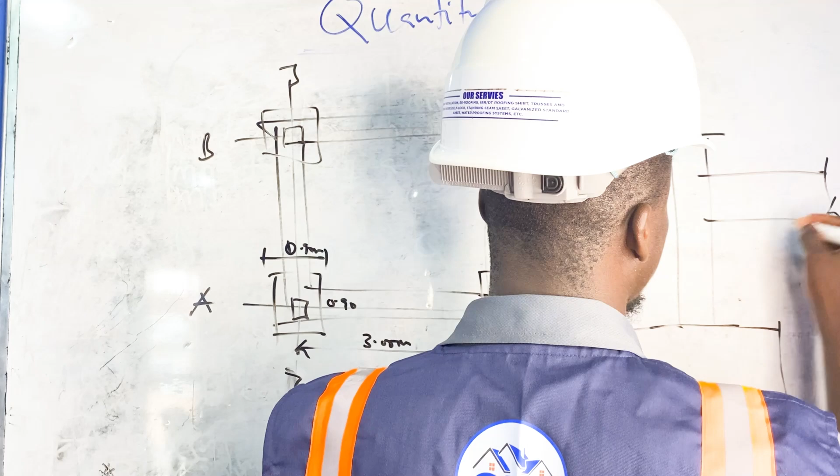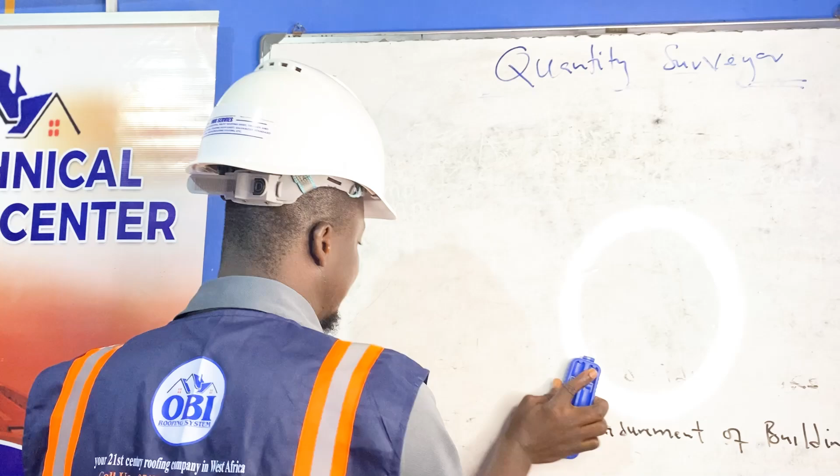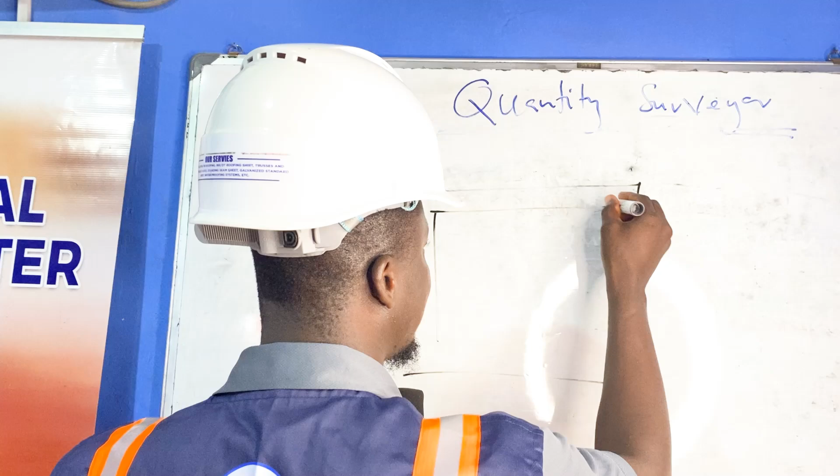So for instance, if we have a particular building, let's say I have this preliminary sketch. This is just an example sketch. I have this as, let's say, just a bedroom with one room over here. So these are my grid lines. I have grid line AA, grid line BB, grid line JJ, and grid line, let's say, XX.

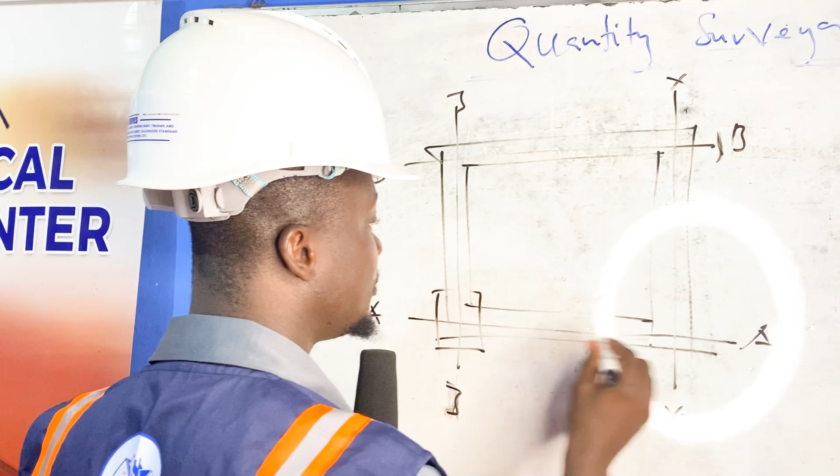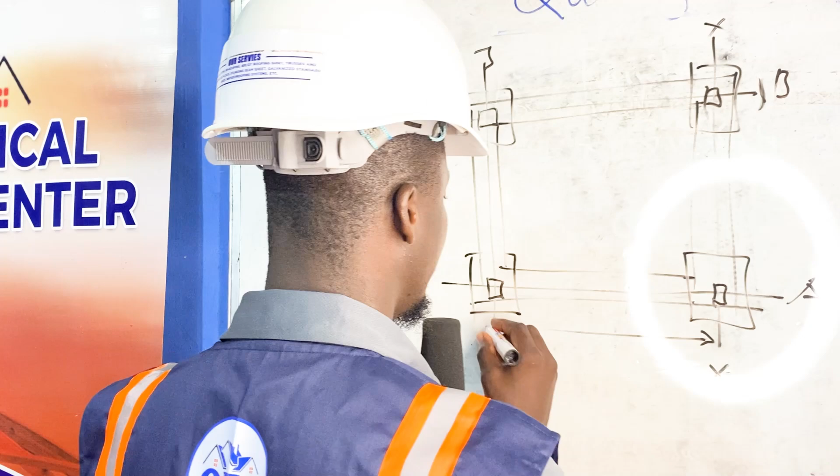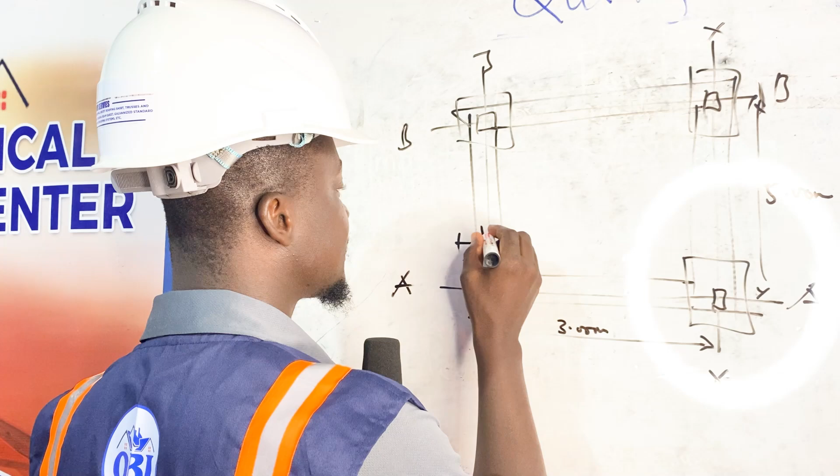Okay, so these are my columns. That's a column base. Then I have my columns within. So this is just a simple sketch. From grid line to grid line, I have here 3.00 meters, and here 5.00 meters. So let's say with the column base, I have here 0.9 meters, and here 0.9 meters. That's equal around the entire plan.

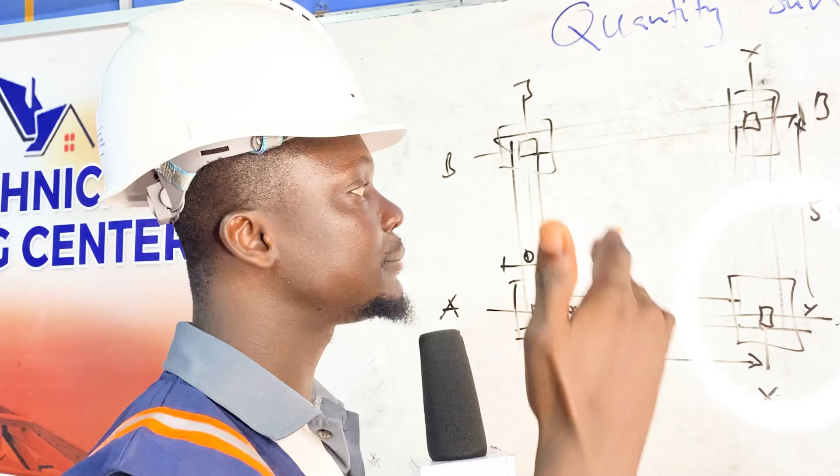So for instance, if I want to measure for blockwork on grid line AA, and I want to know the area, first I consider how high the blockwork is going. If it's within the foundation footing, I want to get to the foundation footing level before the oversight concrete comes on it.

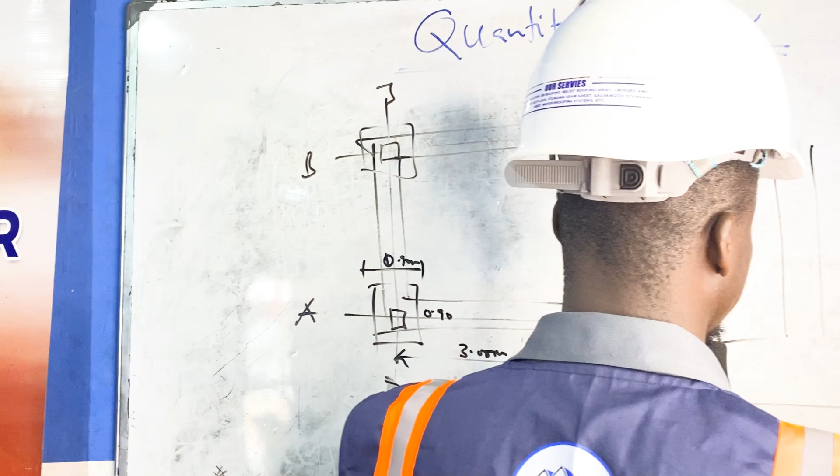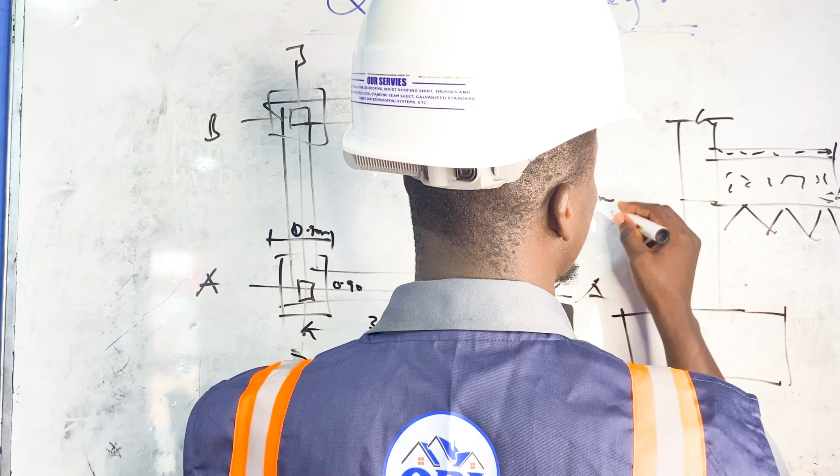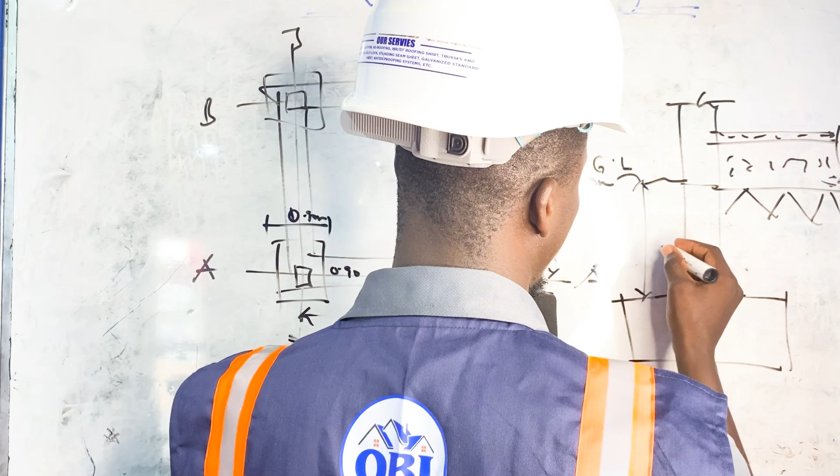So I have a section over here like this. I have my hardcore over here, this is the screed, this is the concrete. My ground level is around this area. From here to the top of the concrete, let's assume I have 0.6 meters. Then the foundation concrete is 0.3 meters. Then I have my blinding, let's say 0.05 meters. So this is a simple section that I cut within the plan.

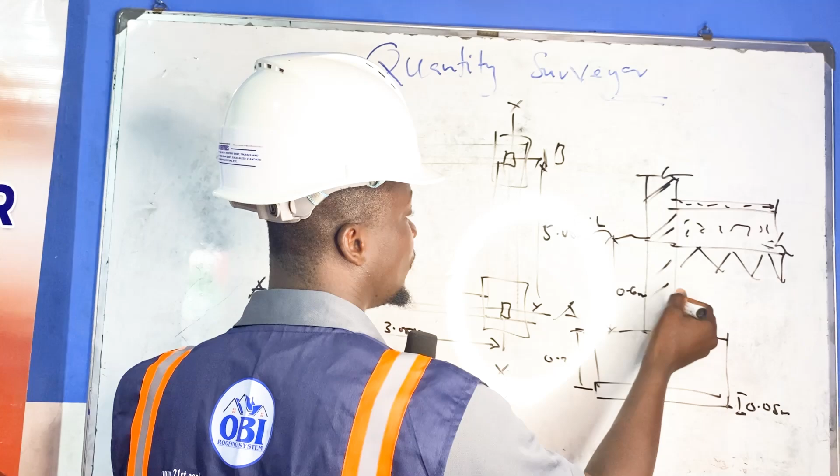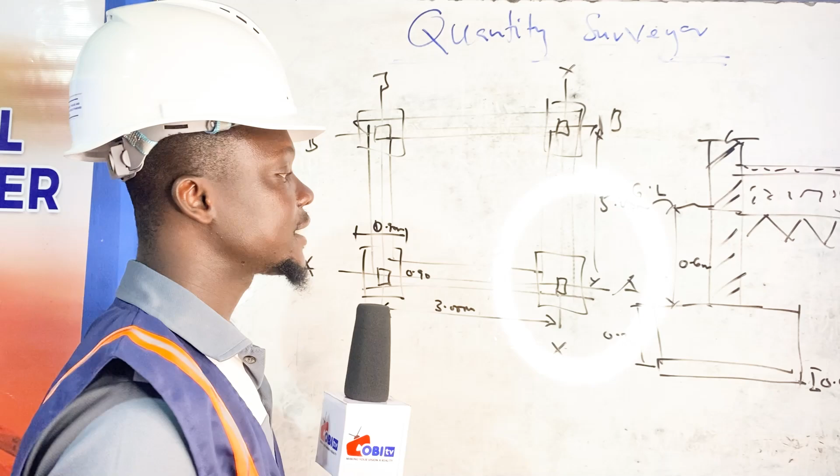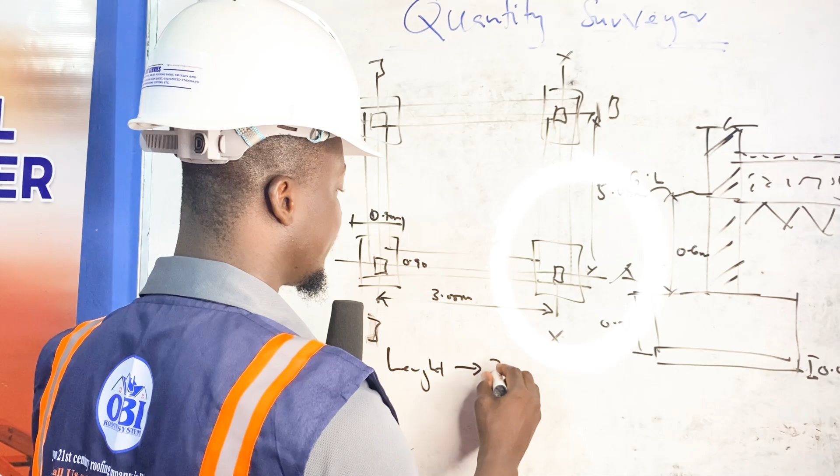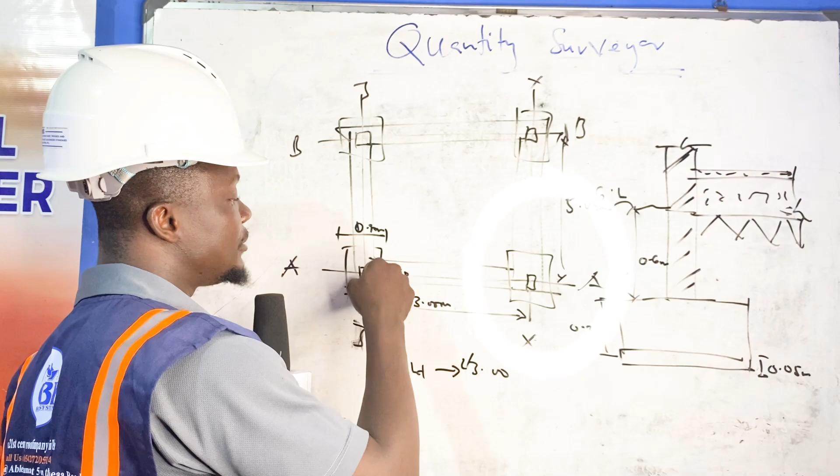Now I'm to do excavation, which means I have to excavate for the trenches. If I pick from grid line to grid line, I have the length, which is 3.00, and I have two sides, so it's times 2. Now you realize that part of it is entering the column base, and we need not calculate for that part. If not, when we calculate the excavation for the column base, it will be calculated twice, which will bring excesses and go against you.

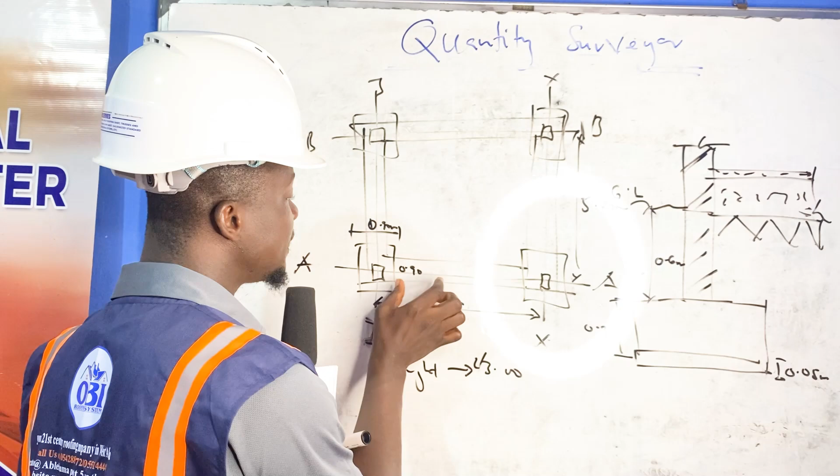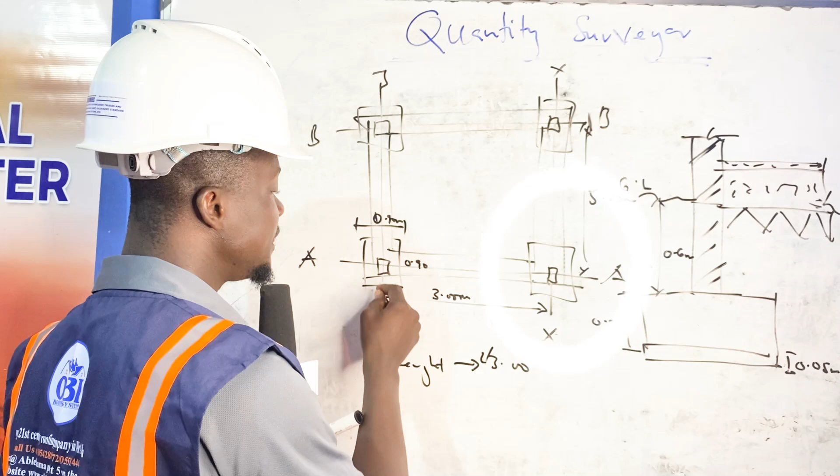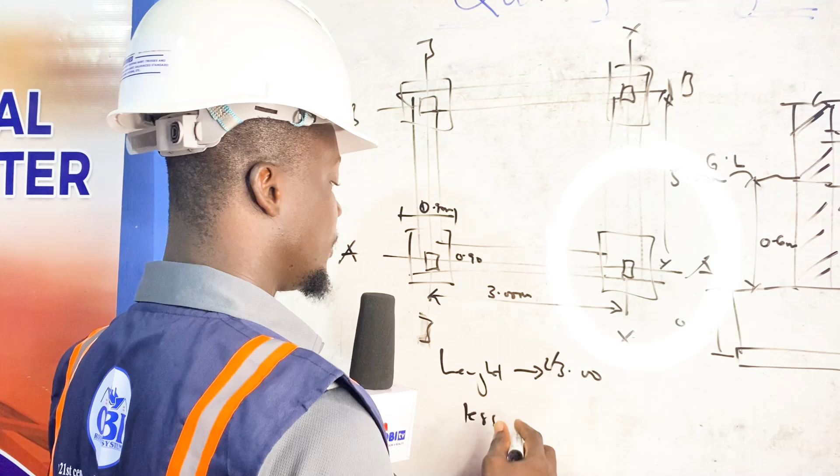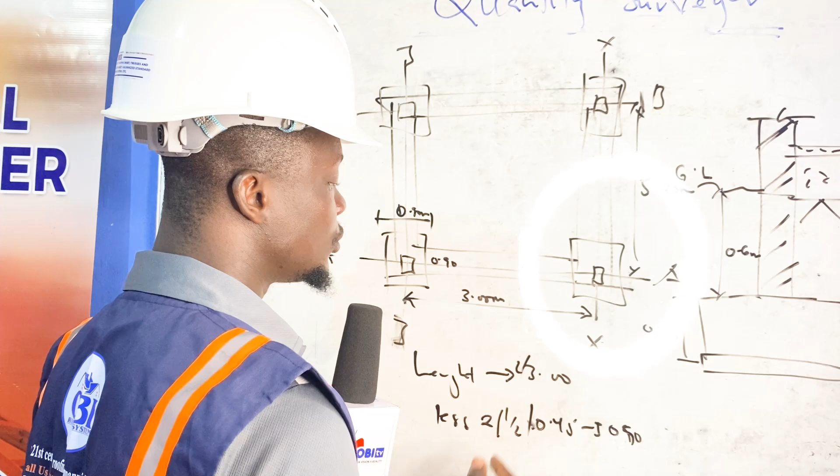So we need to come to the outside of the column base and get the end to end of the trench. If I have 0.9 meters square over here, I take half of it, which is 0.45. So I need to less 0.45 here and 0.45 here, two halves of 0.45, which gives us 0.9. When we less it from the 3 meters, we get the actual length of the trench.

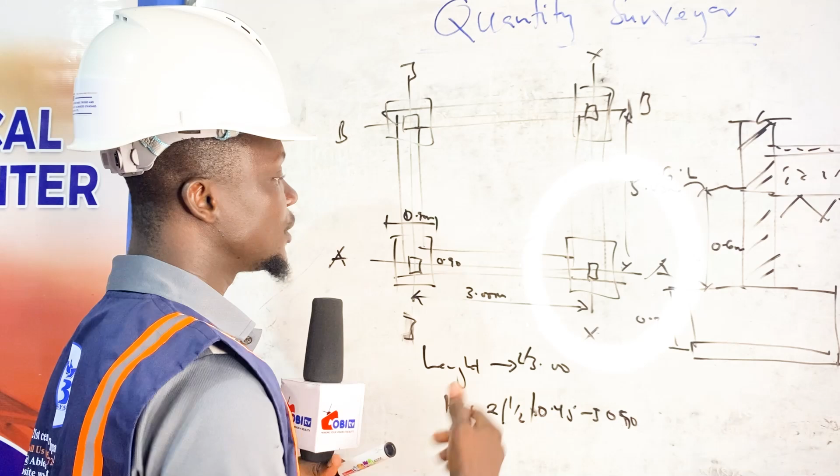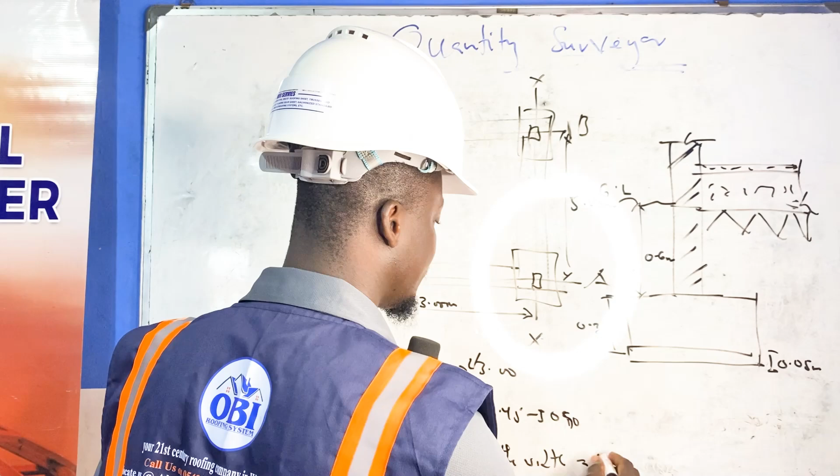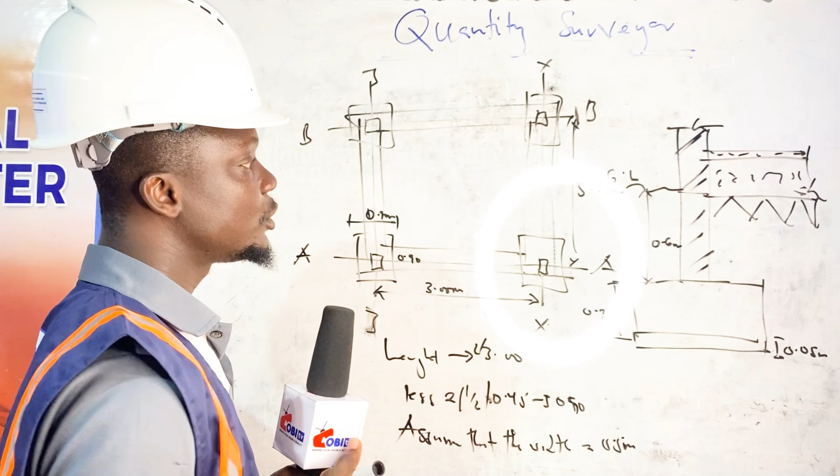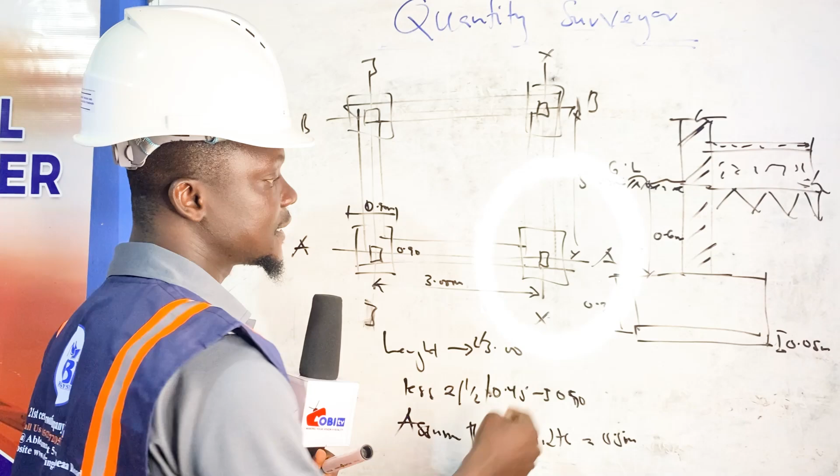After getting this, we need to know the width of the foundation. Assume the width is 0.5 meters. Then we look at the depth of excavation. With the section, this is where the ground level started; this is my earth. The depth from here to the top of the concrete is 0.6. Then I have the thickness of the concrete in foundation, which is 0.3. Then I also have the blinding.

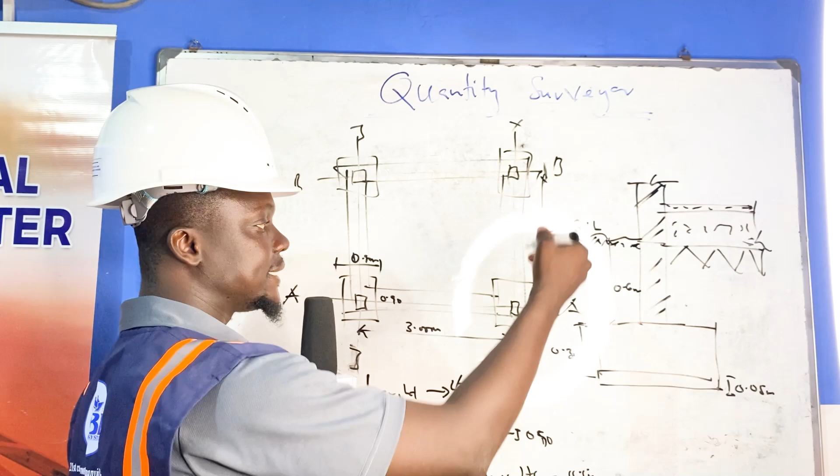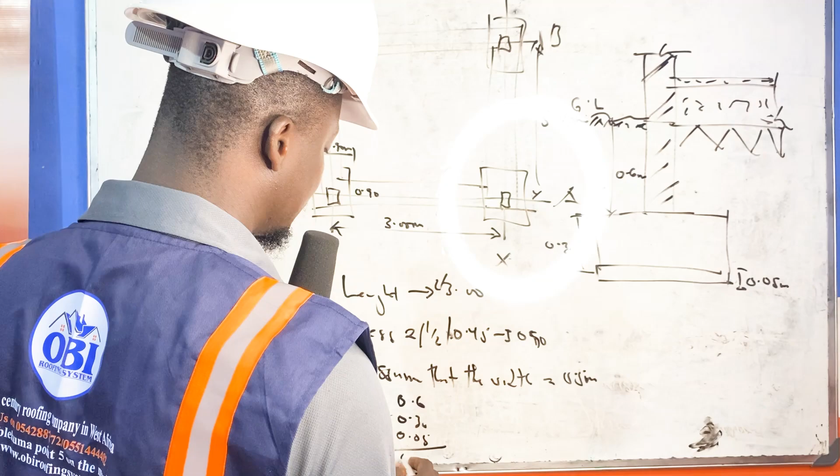0.05 over here. So I need to add up the entire. So I have 0.6, I have 0.3, then I have 0.05 over here. So I need to add up all these things, which will give me what? 0.95.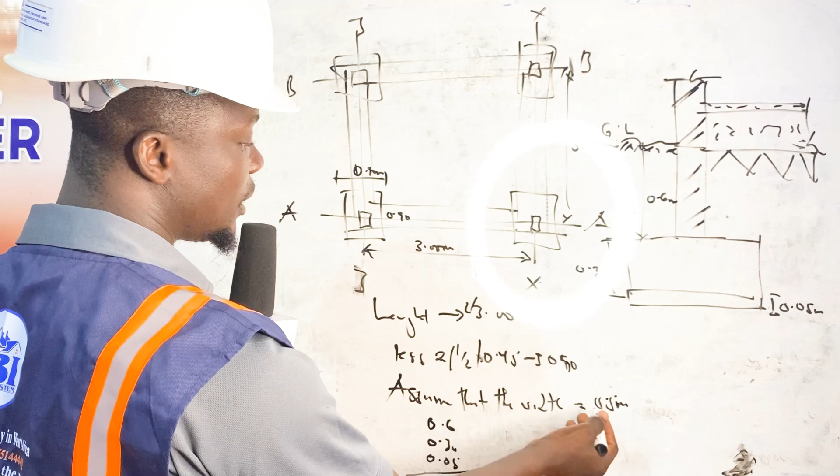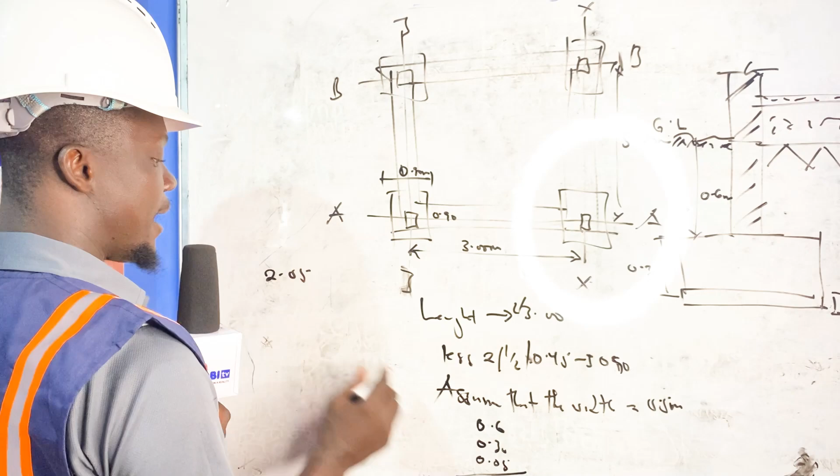So in order to get the volume, I have the length, which is after doing all these deductions. So we have this 0.9, this 0.05. So that is 3 meters from it. So when we less 0.95 from this, that means we are getting 2.05 over there. So I have 2.05 as the length. I have the width of the foundation, which is 0.5 over here. Then I have the depth of foundation, which is 0.95 over here.

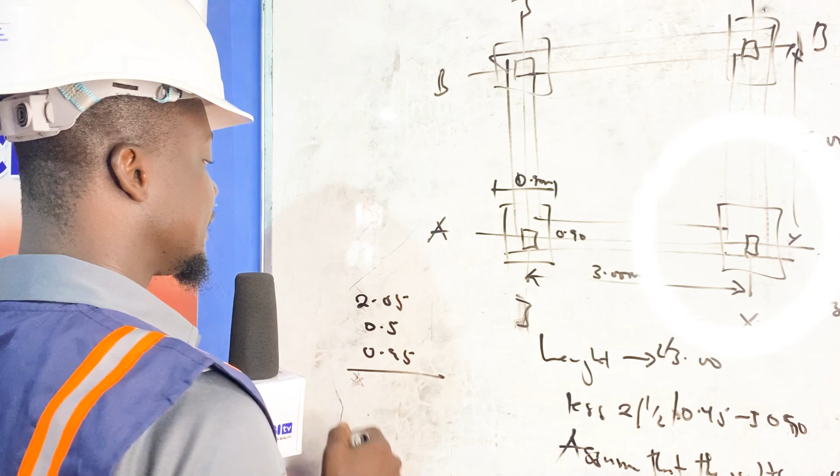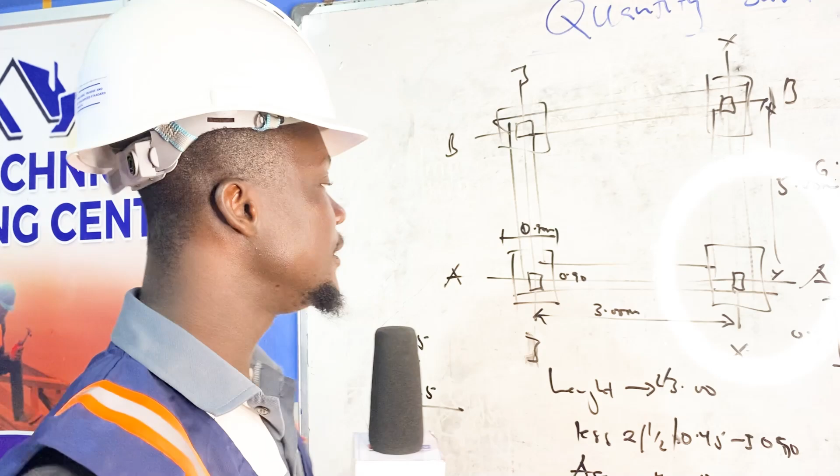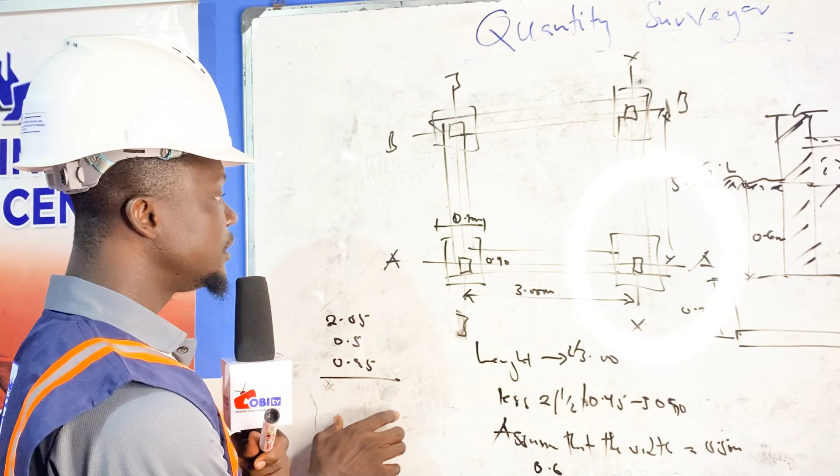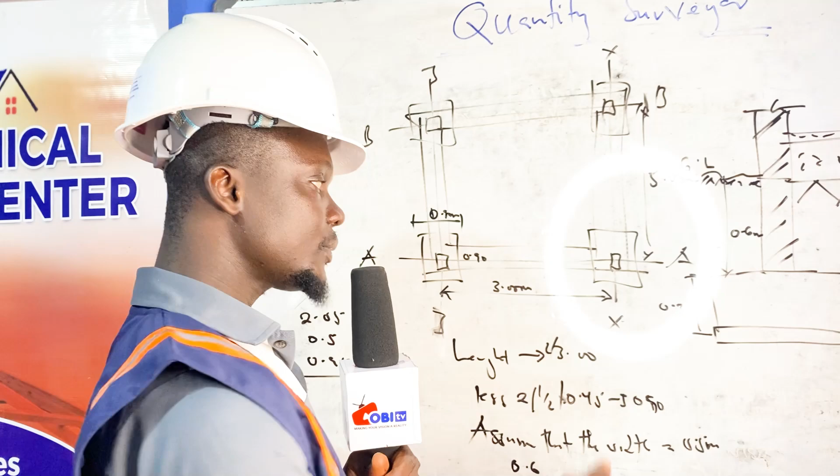So with this, it will give me the total volume of excavation. So if I multiply this by this and this, then it will give me the total volume of excavation. SMM 7 will say that in measuring for excavation for trenches, it's measured in volumetrics. So if I'm able to do this and get the volume of excavation, it tells me that the excavation that will be done on grid line AA for the trench alone will be the multiplication of these 3 items. That will give me the entire volume of excavation.

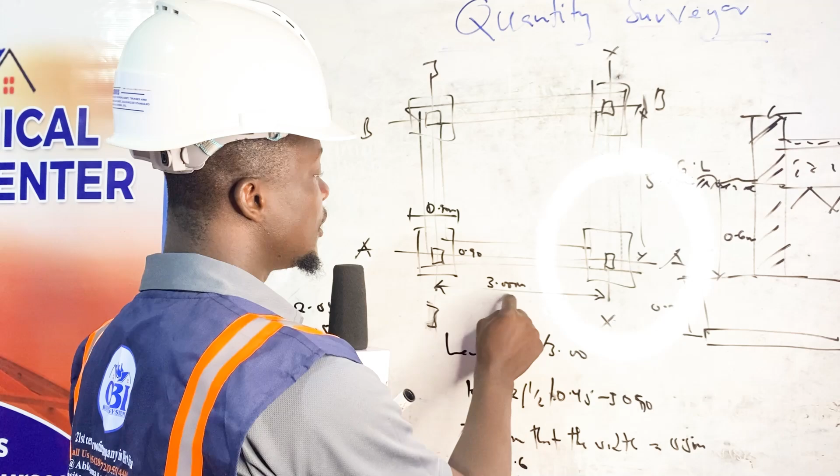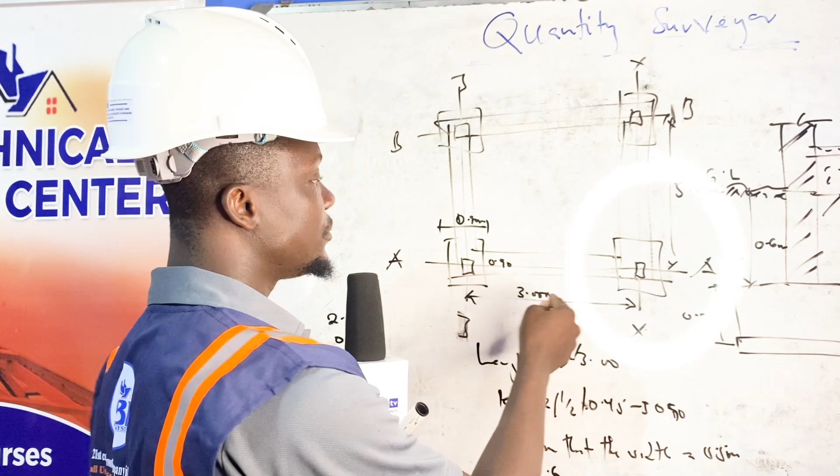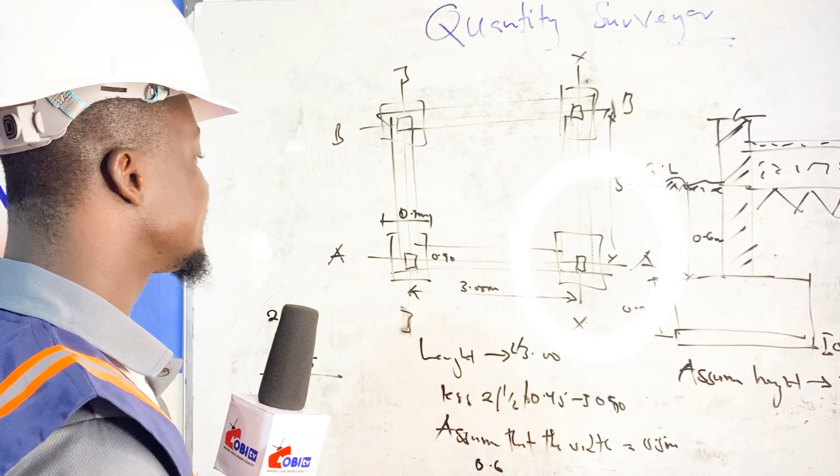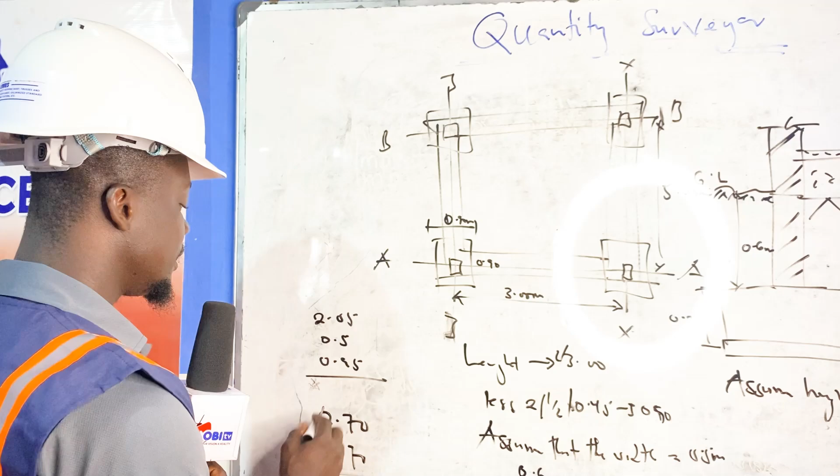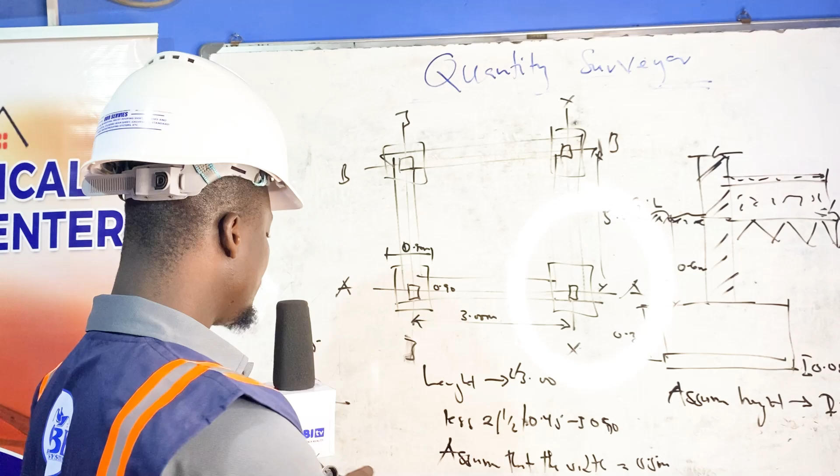So the 2.7 and an assumed height of the block work, which is 2.7 meters. So if I have 2.7 as the length and 2.7 as the height, multiplying this will give me the area for the block work that needs to be done. So these are some basic methods of measurement that are done in construction work. So when we do this, after the abstraction, we put this in the BOQ and we know that for the block work that needs to be done on grid line AA, we need an area of 2.7 by 2.7.

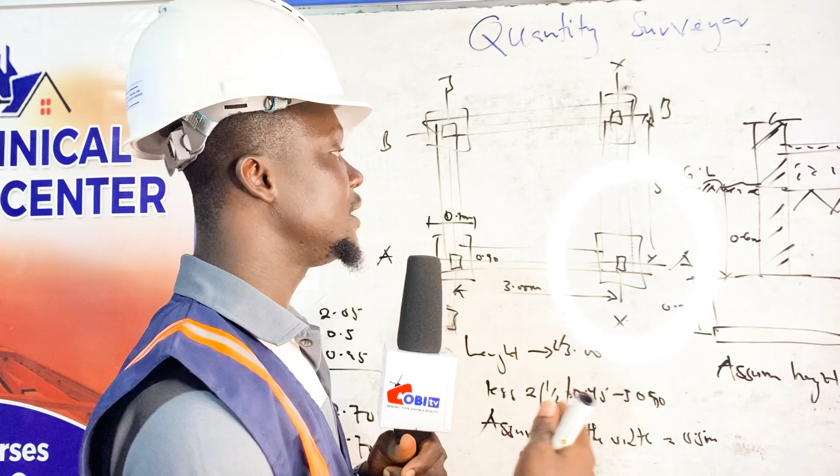Then we'll get a final area, put it in and do the price analysis for that. In our next episode, we do some price analysis estimation, then we get to know how to price basic unit rates, whether in linear, superficial or volumetric. So these are some of the basic measurements that are done in measurement of building works when it comes to construction as a whole.

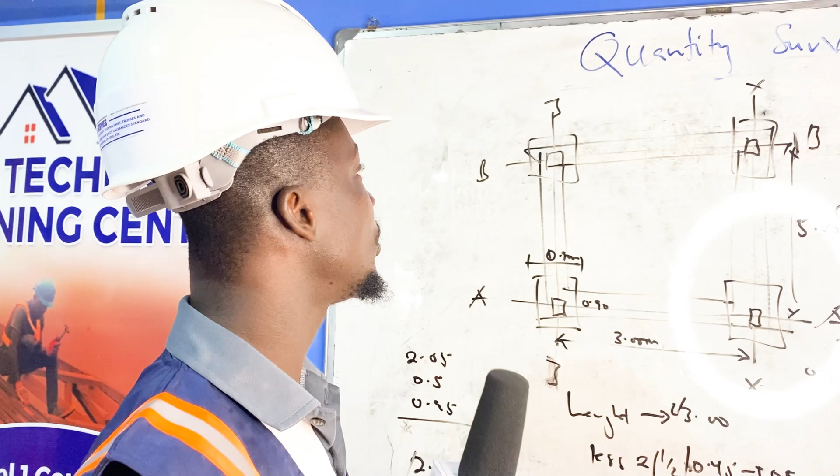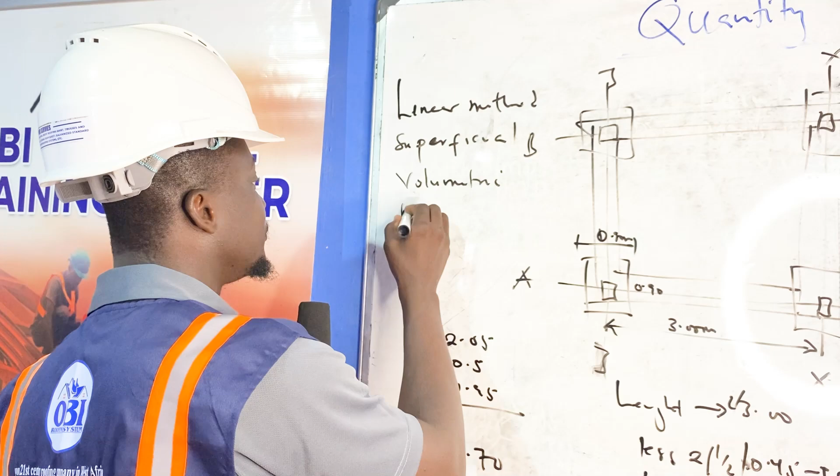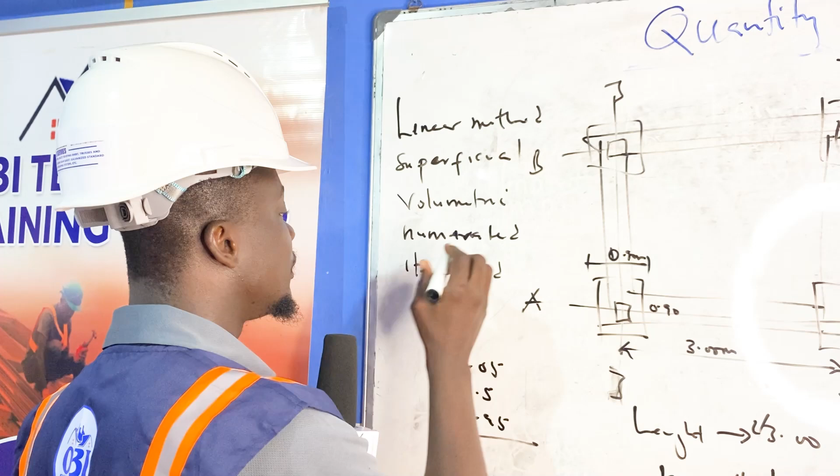Now, we look at unit of item. You also have to know whether this work element is in area, in linear, or in superficial. So unit of item in building quantities, we have what we call the linear method. We have superficial. We have volumetric. We have numerated. We have itemized. We have the provisional. We have the prime cost. So when we talk about linear item, we are talking about items that can be measured in meters.

I won't take much of your time. I'll end today's session over here. We have a lot to learn again. We have the superficial and the volumetric, numerated, itemized, provisional, and prime cost. So in our next episode, we'll go into it and learn more about it.